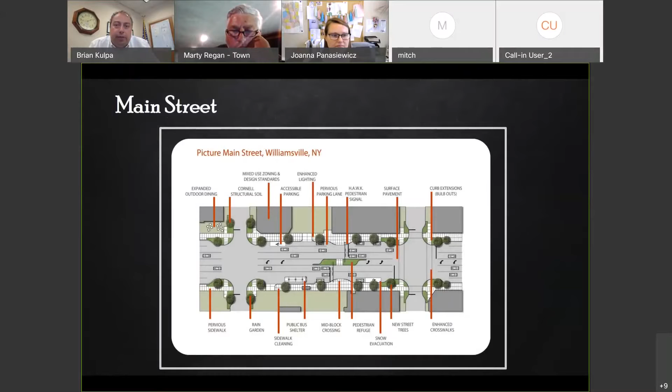And that project in its sort of conceptual configuration featured a lot of things. It featured enhanced sidewalks, crossings. It was about mobility, shared mobility, pedestrian access. It didn't put the road on a road diet, but it changed and sought to tweak a lot of elements. Well, off of Main Street, there are all these sort of impervious surfaces and conditions that we had to deal with.

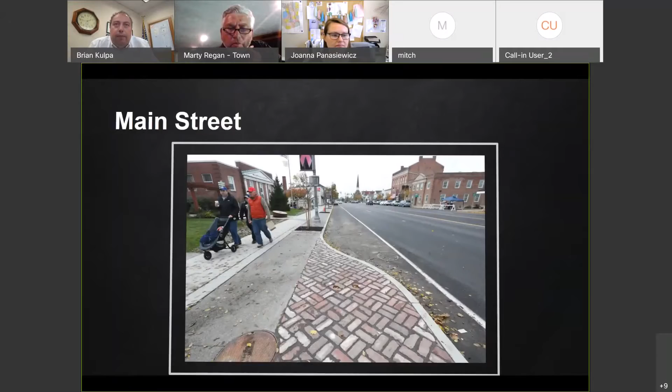So as we were going through the big Picture Main Street endeavor, and that's a look at Main Street, that's kind of how we've repositioned the sidewalks. Did bulb outs, tried to use permeable pavers where we could. As we were repositioning Main Street, we had to look at its sister street, which is Spring Street. So if you've been to Williamsville, you probably know the mill. It's a national landmark. This was it.

When I came into the village, it was about in this condition and hadn't been touched. It was in need of a lot of repair. And more importantly, if you look at that street out in front of it, this street carried all of the Main Street runoff, all the runoff from the nearby parking lots, and let it kind of siphon down this alley and right over the escarpment edge. So it silted in ponds at Glen Park and carried all the pollutants right into Ellicott Creek.

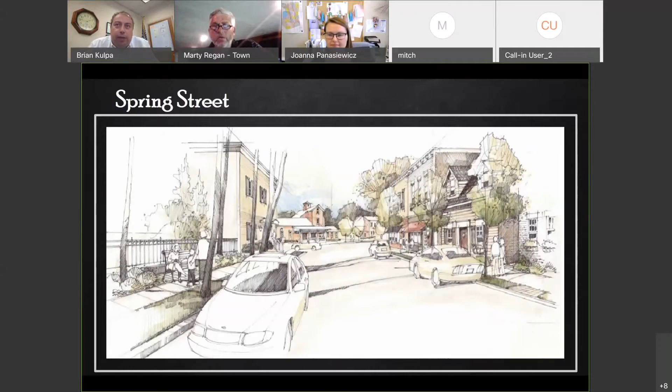So we undertook an endeavor to fix the mill and started to plan for a new street, right? So the concept was, let's do something green. Let's do something that reintroduces nature here. Let's do something that seeks to control. We had an audacious goal of 100% stormwater capture, retention, control, bioremediation, and clean and green release into the areas below. DiDonato Associates, along with Joy Kuebler, landscape architect, were the design team for this project.

Frankly, we chose DiDonato because they had a previous experience up at the Falls with Old Falls Street. That was always a street that kind of captured my imagination as to what you could do and how you could control stormwater. And this is kind of the plan, the site plan, if you will. And what it featured was a number of things.

I'm not sure. Can anybody see my cursor moving around?

Okay. So Main Street runs east-west. Part of Main Street in front of Eagle House and Town Hall and Village Hall doesn't actually have any storm sewer. All that water just sheds, and it sheds down Spring Street and down Rock Street, and then it would literally, in the past, just dump over the escarpment edge around these areas. So this is the mill.

So what we said was, look, let's take all that stormwater action off of Main Street. Let's take all of the runoff coming down Spring Street and Rock Street, and then try to gather as much runoff as we can off of these buildings and these parking lots and carry them through a series of stormwater plantings or rain gardens on Rock Street and on Spring Street. Carry them into basically a giant filter system. It uses mechanical, but it's really passive mechanical.

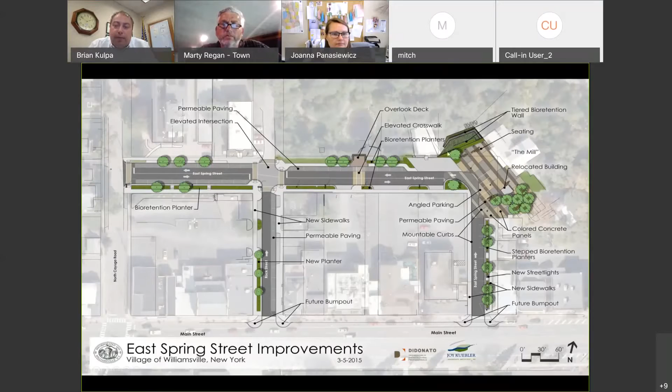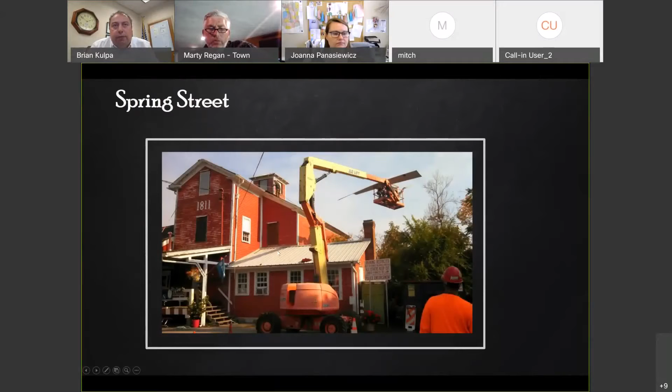So, the mill project was using state historic money, basically SHPO EPF funds. We had help early on from Mary Lou Rath when she was still a state senator. Later on, our Historic Preservation Commission worked directly with SHPO to continue moving the project through. And as we were transforming that project, we were able to try out some stuff. So both Joy Kuebler and I believe in tactical urbanism, just trying stuff out, seeing how things look.

So a lot of the radii, when you do a bulb out or when you do a planting like this, some of what you hear is the fire company saying we'll never be able to get our vehicles around it. And so we actually tried out some of the stormwater plantings by just bringing in wood chips and plant material in pots to see what it would look like, how it would feel. Volunteers did the quote unquote planting. All that material later got transplanted.

In the mill, we started to brush up how we celebrated Christmas. Had Santa, changed that. You put in a comic book store and you get away with a lot of other things, which started to attract people, right? Even if it was Jedi Training Academy. It started to attract people and attention to that.

And this is a look at the project as it was just being completed. So I like this shot. If you go down there today, of course, there's a lot more stuff on it. I like the shot because it's one of the cleanest shots of that mill plaza that we built. The mill plaza was designed to be a public plaza.

You can see here clearly it's just broom finished concrete, and everything pitches into these areas here where we've got the Unilock product set, and everything underneath is meant to hold and slow the flow of water so it enters the bioswale slowly and in a controlled manner. This is a look up Spring Street. Again, this is right as construction was finishing, so you don't have the vegetation in the planters yet, like you would see today or you saw in the video.

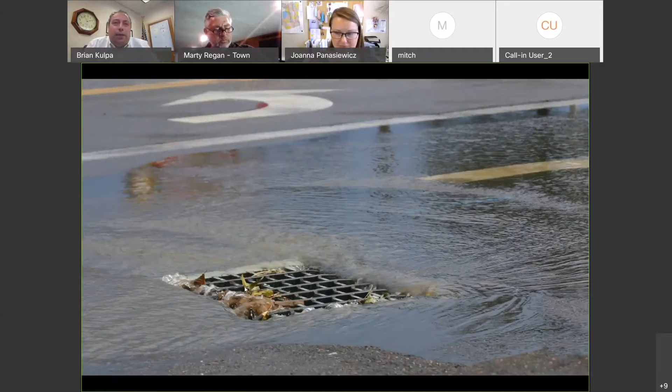So now the challenge that we've taken on, both in Williamsville and in Amherst, is saying, okay, we've got to continue this now. We've created a legacy using a series of Empire State Development grants, GIGP grants, and WQIP grants from New York State DEC, combined with boosts from some SAM grants through Senator Ranzenhofer, to pull all that off. But we got to take it a little bit further.

Amherst, if you don't know, the southern portion of Amherst is about a 30 to 40 foot escarpment, sits on shallow bedrock, dolomite, right up to about 6.5 feet. What that does is it supercharges water that gets into the system. You get into the bedrock, it finds a fissure and it goes quick. It gathers and gets going pretty quick.

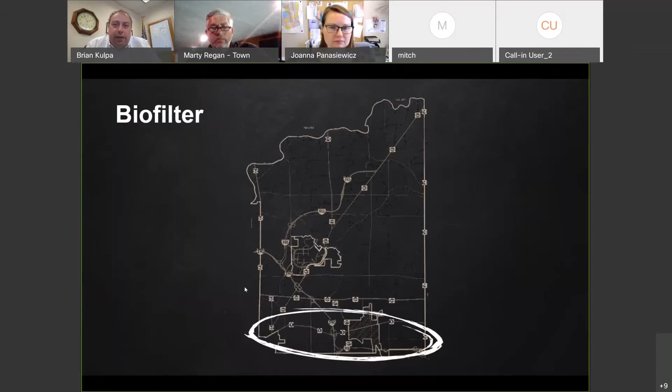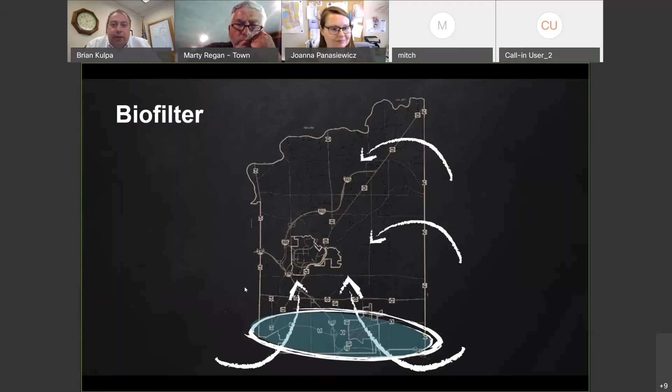And the north half or the north 2/3 of Amherst, or maybe even 3/4 of Amherst, is an old glacial lake. And if you looked at the soils in that old glacial lake, if you look at the soil map in color, you feel like you should put on a pair of colored sunglasses and start listening to Hendrix, because it's really a trip.

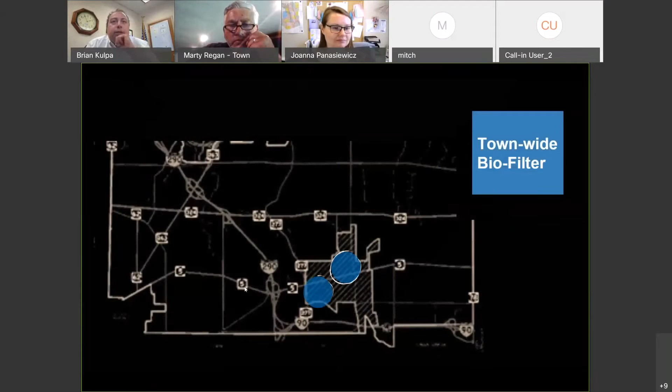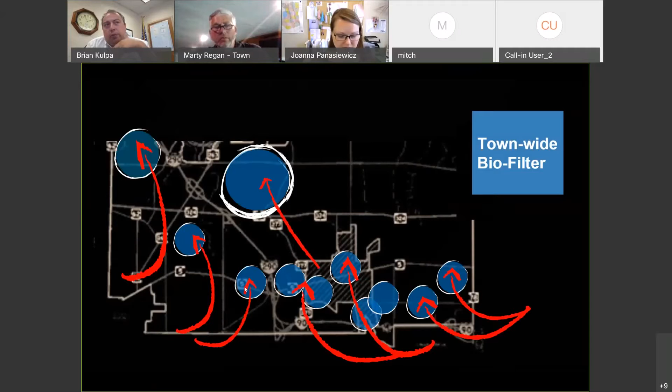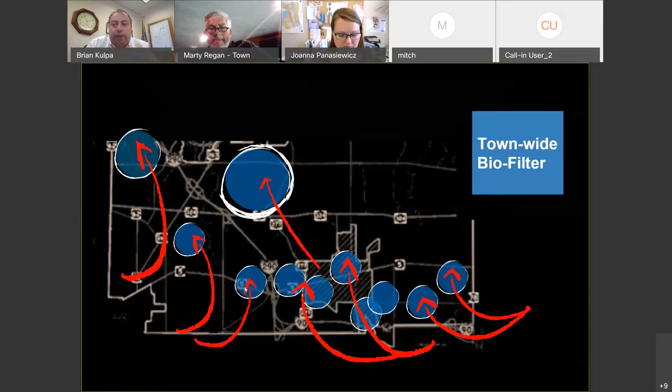So what we're trying to do now is basically daisy chain a series of green infrastructure projects throughout the southern edge of the town of Amherst, so that we can control and take as much of the stormwater runoff off of our old traditional street grids and parking lots and stuff, and put it through its rigors in a green infrastructure system and create sort of a town-wide biofilter.

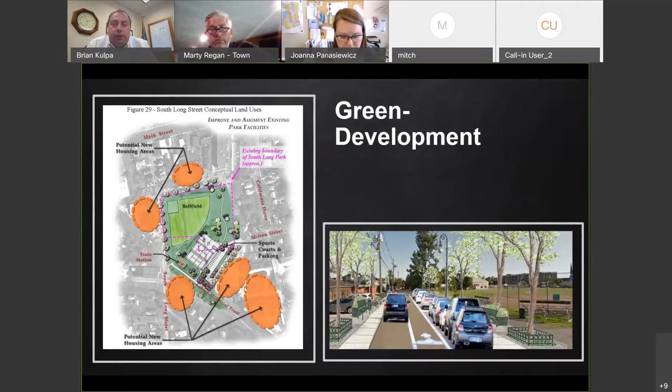And we started that process right at the Village of Williamsville. We did it along South Long already. South Long is the street where D. Camillo's is cornered on Main Street. That park area, these were kind of just concept sketches. But that project really got moving with green infrastructure. Again, GIGP and WQIP grants working in tandem.

We're doing it with the same grants at Delwood Statler, which is a park where we're going to take all of the stormwater runoff off of Longmeadow and Delwood and some of these old post-war tract housing streets. And this is really the first time that anybody in the state has taken a post-war tract housing subdivision and took all the stormwater and fed it into bioremediation.

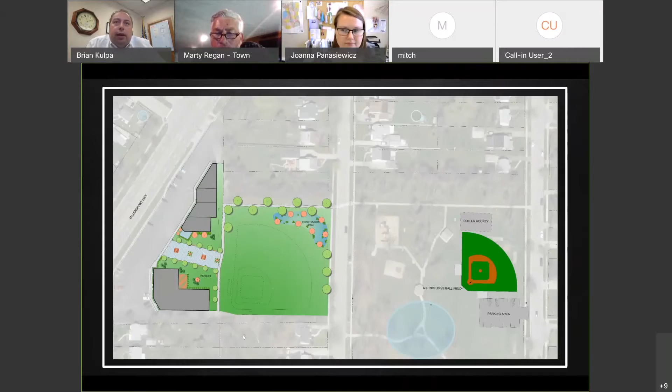We're doing it at Statler Park with a big catchment area, but we're basically using a series of green infrastructure measures through both parks to do that. And kind of a look at what future measures may look like. How green infrastructure systems can work within a.

But Amherst isn't stopping there. We're kind of exploring, right? We've got this picturesque waterfall coming over the escarpment edge, but like I said, the nature of it is we have a lot of water power, right? This isn't after anything special.

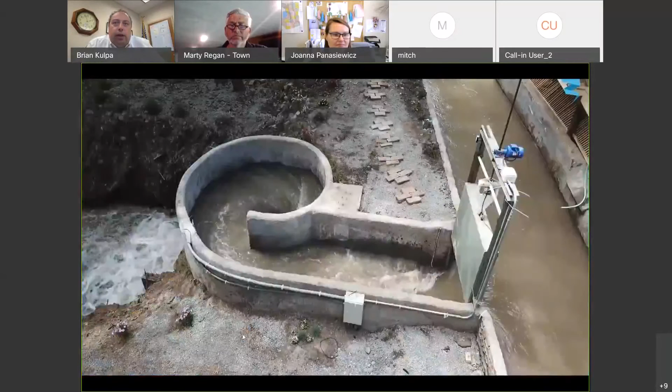This isn't a heavy rain, and so what we're looking at now is retrofitting the dam at Island Park with low flow hydroelectric generation. Looking at building a series of these small chamber sort of inline turbines along Ellicott Creek. These are fairly low flow. You don't need a ton of elevation to build them. This isn't about green infrastructure, but it's about clean infrastructure, and they go hand in hand.

So as we continue with this perspective of green, our attention's really turned to the west side of the town. That's an interesting area of the town. We have 9 low mod census tracts. It's the second highest density in all of Western New York after the village of Kenmore. And we've got 2 active sanitary sewer overflows, SSOs, in that area, which lead to 2 environmental justice zones.

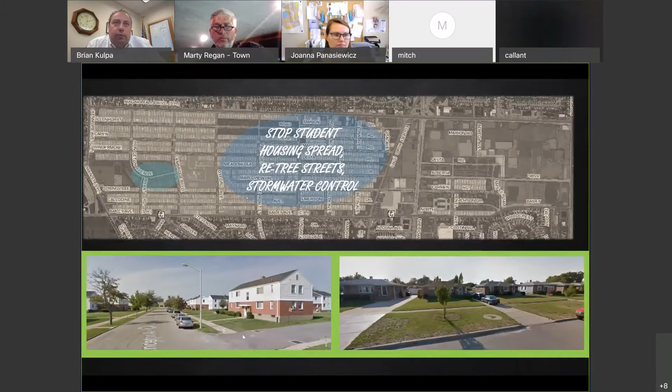So it's an area that's economically challenged in terms of property turnover and home ownership. It's an area where we know we need to do some significant work in terms of re-treeing streets and doing stormwater control. What we're doing at Longmeadow and Sattler is going to help this, but it's only a start.

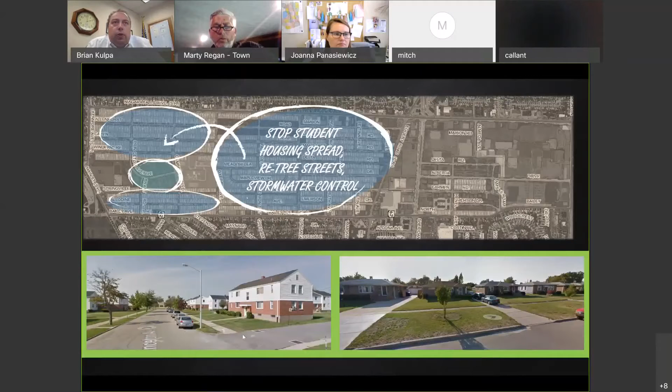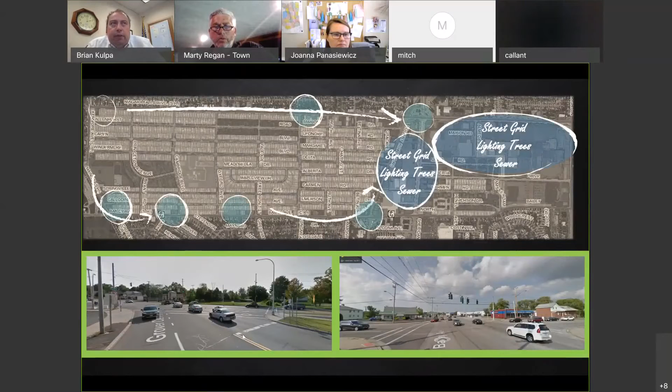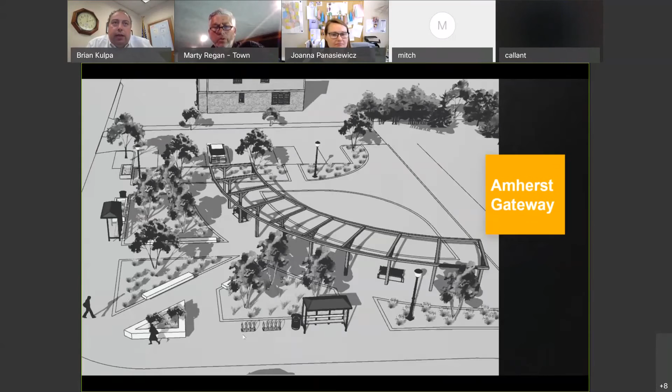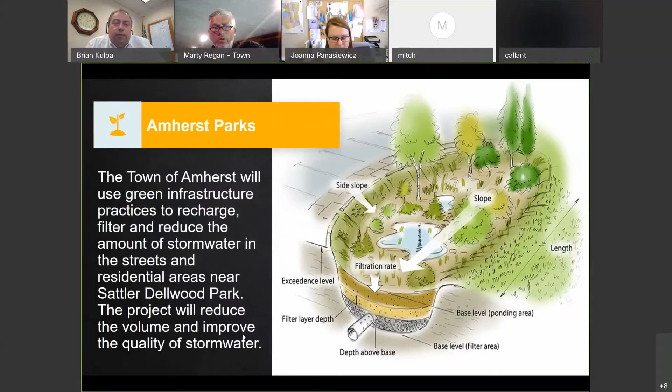So we're looking at other projects and moving forward with some other projects that kind of re-envision these areas, and where we have a hard time retrofitting dense neighborhood grids, we're taking advantage of locations like this, right? My favorite eminent domain project in all its glory, turning abandoned fields into stormwater collection systems, green parks and infrastructure, kind of cutting off the water where it starts, using small stormwater, rain gardens and small stormwater collection units. That's a future. I should have used that instead.

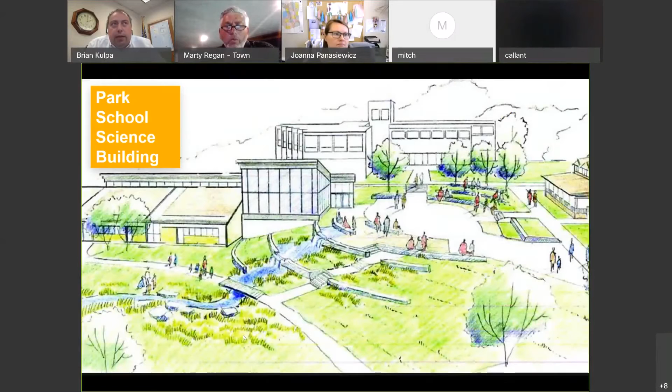We partner with some private schools. Park School did this with their science building. If you haven't been there, they did 100% collection off of their building and their site improvements. They feed into a pond that's always been silted over, frankly was dead and stagnant. They did a recirculation system where they pumped it back up and circulated it through a creek, and now there's all sorts of life in that pond again. And the water that they're pushing out into neighboring areas because of groundwater and stuff is clean, and it's been aerated, and it's got all sorts of benefits to the area, including sort of aesthetic benefits.

And then the big thing that you've seen probably in the Buffalo News, if you haven't, there's a couple of articles out there, but we've got this big legacy green space right in the middle of town. So this isn't us, this is Burchfield down in West Seneca, but this started to kind of shape how we envisioned Delaware Park, of course, how we envisioned an approach to Westwood, where in Westwood, Ellicott Creek gets really channelized, and it's been channelized for some time. So we were working with the Army Corps of Engineers on some early concepts to take Westwood, use the weir that sits on Ellicott Creek near Maple Road, and use that to carve out the old floodplain that was at Westwood to restore sort of littoral emergent and riparian wetlands in that area.

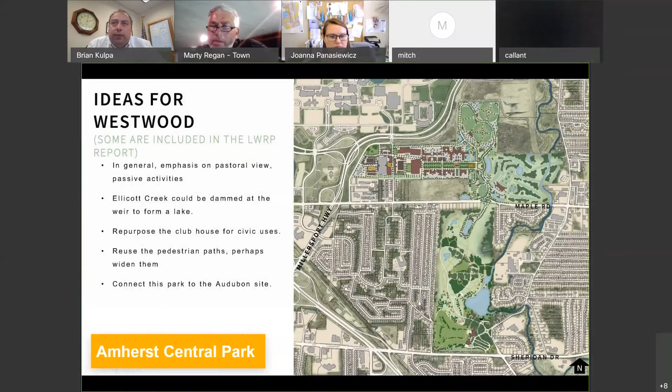And this is kind of an overall perspective of what we're thinking about doing there. Westwood is down here. It's a country club, about 171 acres. This is that kind of dredged out wetland reservoir lake that we're talking about doing. You can see a number of these wet areas or new created spaces for stormwater. And what we're talking about here ultimately is basically using the existing grade lines, taking out all that fill that was put in to channelize the creek and letting that creek take its natural turn. When it hit this 90-degree bend, it used to just kind of flood out back in the day, and that's what we're hoping to restore. So that process is moving along. It's something we're pretty proud of. I think this is going to be a great benefit to a lot of people.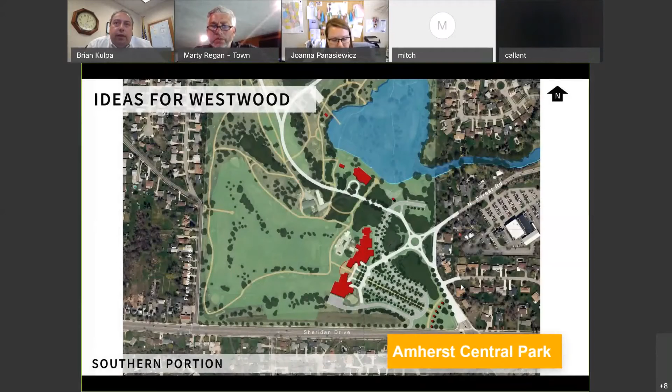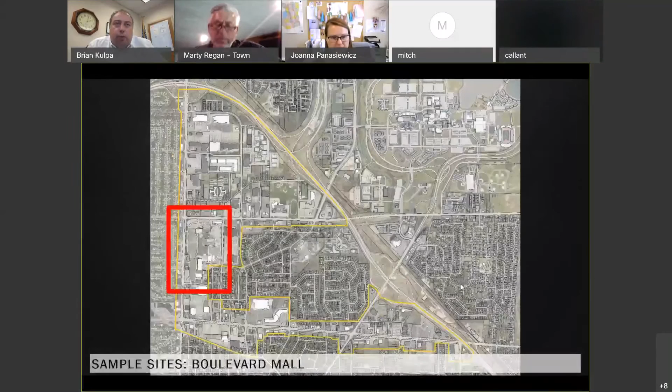And then the final is the Boulevard Mall site, right? It's 64 acres. We had to figure out how to work through a zoning that envisioned this sea of asphalt that basically dumps a lot of stormwater into our underground collection system and takes it right to Ellicott Creek over by Tonawanda, or infamously floods Niagara Falls Boulevard and Maple, and do stuff on site. So our zoning calls for street trees and green plantings along the streets. It also means that there has to be at least 10% dedication of green space collected in bigger green space. You can't just spread it out. You have to collect it.

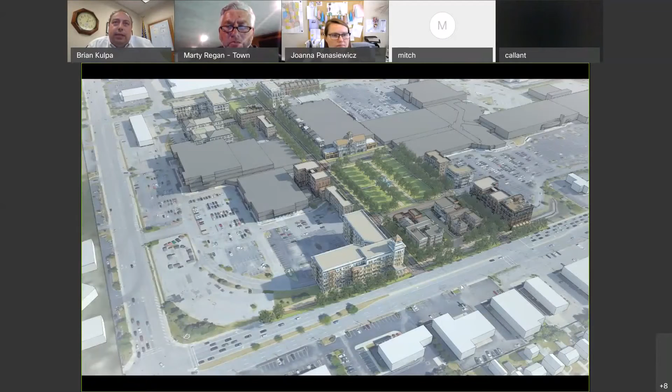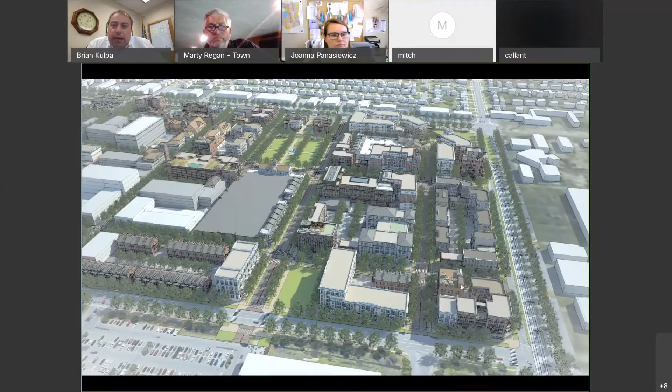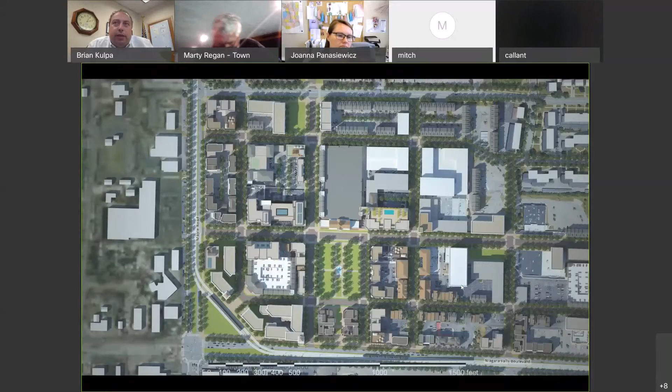So we're going to get to do new public parks and really take that sea of asphalt and regreen it over time. It's not just about adding density, but it's adding stormwater features, and it's about facilitating people and green. It's about cleaning up legacy big box and legacy parking lots and legacy concentrations of salt and pollutants and acidity, and making them sophisticated green spaces. We've even been looking at, just for the sake of giving the NFTA something to think about, if the light rail is going to come, doing that on green medians and green islands in Niagara Falls Boulevard and along Maple. And to me, this is pretty stunning because this is ultimately how you change a place and how you change your perception of stormwater and your perception of gray water. And so that's what I've got to share.

Great. Fantastic, Brian. It looks like you guys are doing a lot of really nice, good things up there. It's impressive. We've put an emphasis on stormwater collection, control, and remediation as a way to not only be environmental stewards, but also to frankly beautify the town, and use those elements to our benefit.

I actually don't know how to stop sharing this, so you might be staring at my screen for a little while here.

But the notion that you've got an asset in this gray water that people don't think about as an asset, right? Think about how you get rid of stormwater, how do you mitigate it, and we're like, no, we can turn it into a feature, and that's kind of what we're really after. That's great. Does anybody have any questions for Brian before we move on?